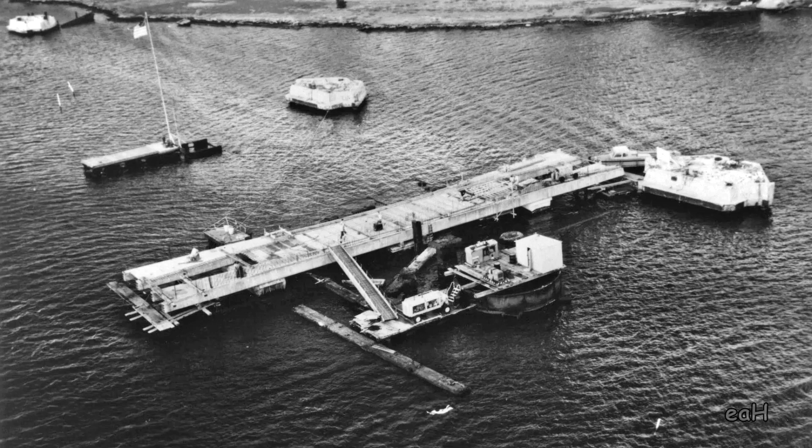Sounds good, except that this wedge is 184 feet long, and it's sitting over the memorial, the Arizona, which is shifting in the mud. Solution: stressed or reinforced concrete, very much a pioneering technology at the time, in the shape of tuning forks, separated by 111 feet, but you're on this very, very unstable ground.

What do you do? Even though the water is only 40 feet deep over the Arizona, you sink the piles down 150 feet for stability. We're talking about an engineering feat here.

Fast forward to all around the Pacific, job after job after job, patent after patent after patent regarding reinforced precast concrete. And it gives me pleasure to first bring up Mr. Hans Krock, who is working to this day with that scrawny kid terrified in Kaimuki. Mr. Hans, it doesn't look too scrawny right now.

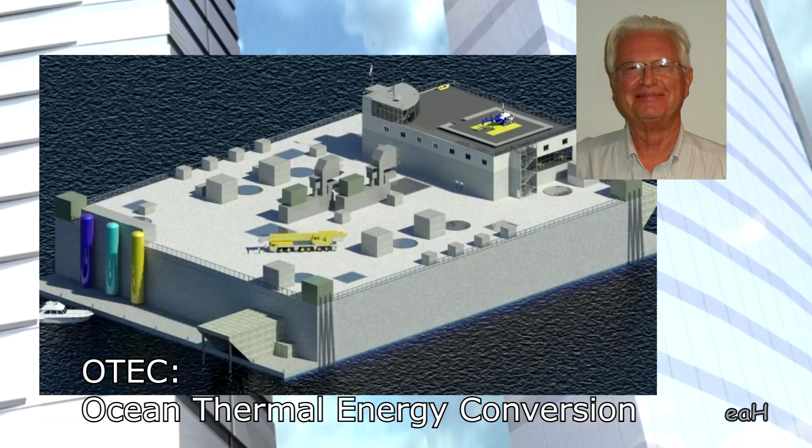Thank you. It's been a delight these several years to work with Al Yee. We're working together to develop OTEC, and the key element to making this a success is Dr. Yee's platform. We hope to be instrumental in a revolution in the Pacific about energy production, water production, and all the associated good results from the largest energy resource in the ocean. Al is a delight to work with. Every morning he comes up having invented something new overnight. It's amazing, his brain never stops.

And so I would like to introduce him to you. One of his achievements is the wing, the structure, the sail, one of the tallest, thinnest buildings ever built, actually. He successfully built that in Singapore. So let me give it back to you. Mr. Al Yee.

Thank you very much, thank you all very much. I don't know how to start with this kind of introduction, so I'll just go on to the subject matter. We practice structural engineering, and many times we are at the service of architects. The architects require certain column spacing, certain directions of beams and slabs and spans. Our job is to make it practical, make it buildable, and cost less.

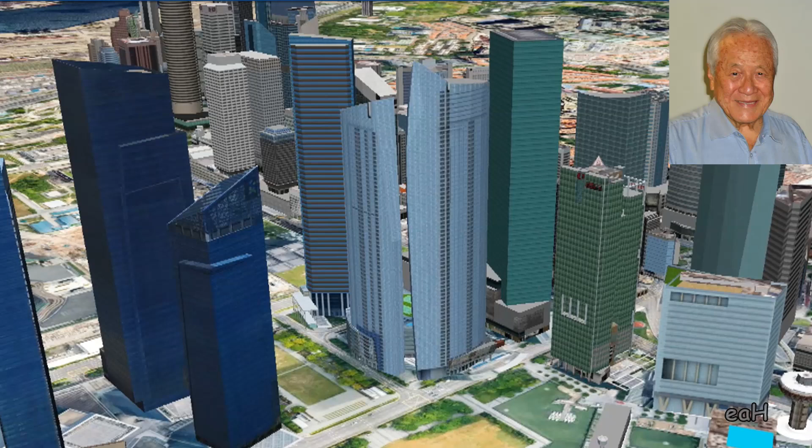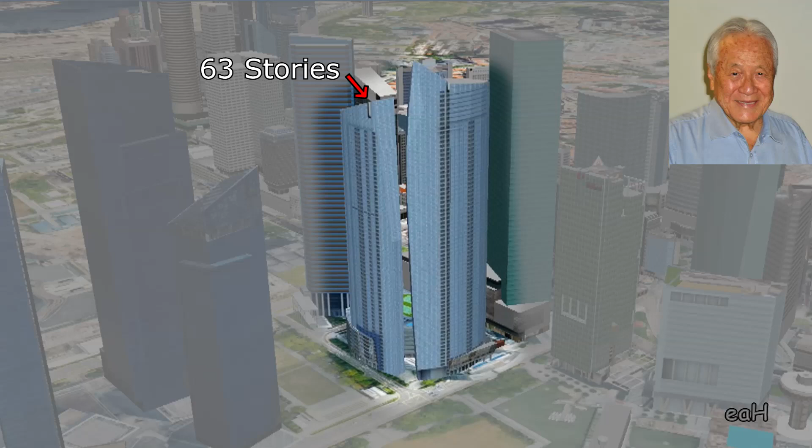So in Singapore one day, we had a commission to design two buildings. One building was 70 stories high, and the other was 63 stories high. These buildings were to house 1,111 condominium apartments. It was built right on the shores of Marina Bay, a very expensive, high-class district right near downtown Singapore.

The architects were from Seattle, NBBJ, which stands for Naramore, Bain, Brady, and Johanson. I know all the partners from the old times, and they're all retired now. I was a little kid when I started working with them, so I'm following them closely.

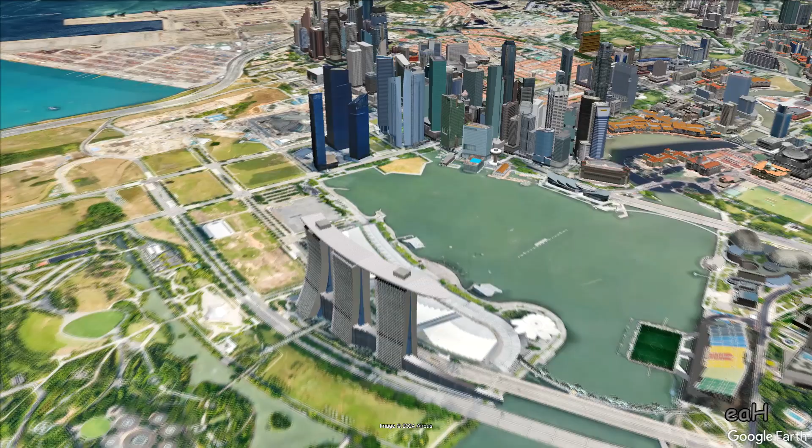Anyway, they came in and mentioned that this very thin tower, Tower 1, the tallest tower, is 245 meters high. The floor plan is like a football, so it has a wider and a narrower dimension on the plan. The widest plan portion is only 22 meters. So the aspect ratio is 245 over 22, which is over 11. Not many buildings I know of have an aspect ratio of over 11.

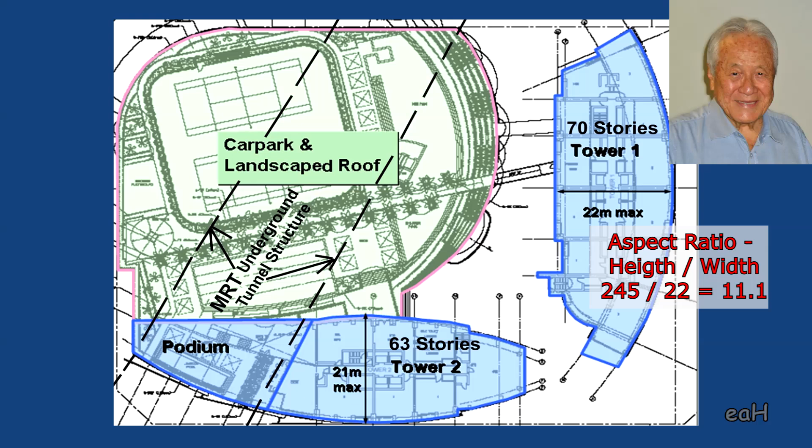If you take a 12-inch ruler, 1 inch wide, and put it on your table like that, that's an aspect ratio of 12. Ours is a little over 11, so you're talking about a very slender building. I can do the 12-inch high building, but I don't know if I can do an 804-foot high building. We warned you that we designed 5 of these projects, and none of them got built because the price was too high—they're so skinny.

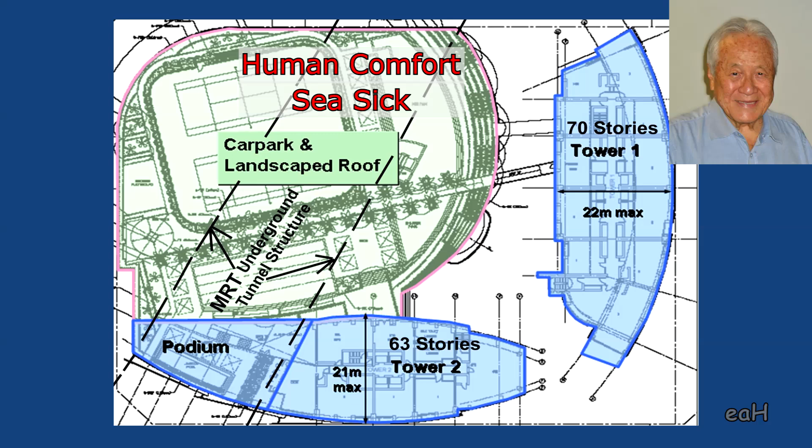Many things you worry about in high-rise buildings. Number one is human comfort—that's the term I use, because you can get seasick if the building rocks, due to the von Karman vortex. The wind doesn't have to be high, it's just a normal windy day, and you can have this vibration. So that's the biggest worry.

Of course we also worry about strength. In the year 1999, Taipei had a huge earthquake, and I went there to check some buildings for a client of mine. I saw a high-rise building lay flat on the ground, like somebody going to sleep. It's scary—you see the windows, doors, the corridors, everything. I said, wow. But anyway, I told the architects that if they pay attention to our suggestions, I think we can bring it in within the price, and get it built.

This cantilever from here to here, this bow sticks out 10 meters, about 32 feet. This guy here goes backwards. This is a 63-story building, and this is a 70-story building. It's right on the shores of a beautiful Marina Bay, where the Sands Casino is located, along with financial centers and all kinds of things.

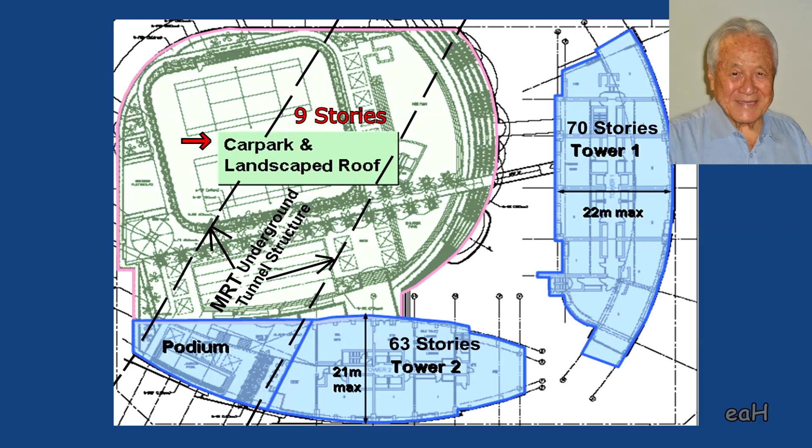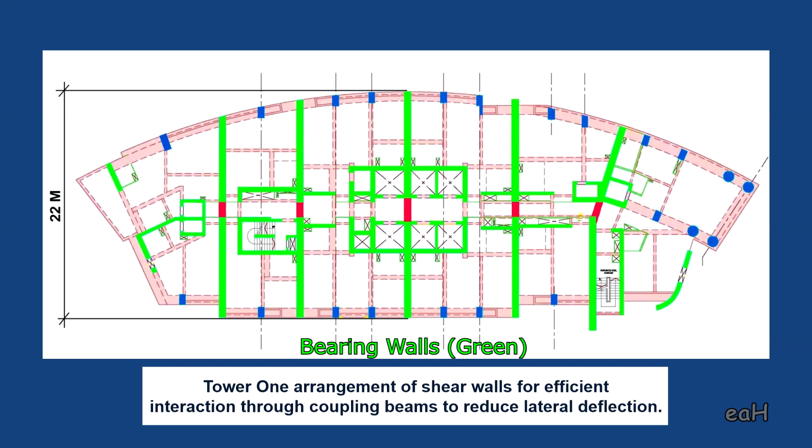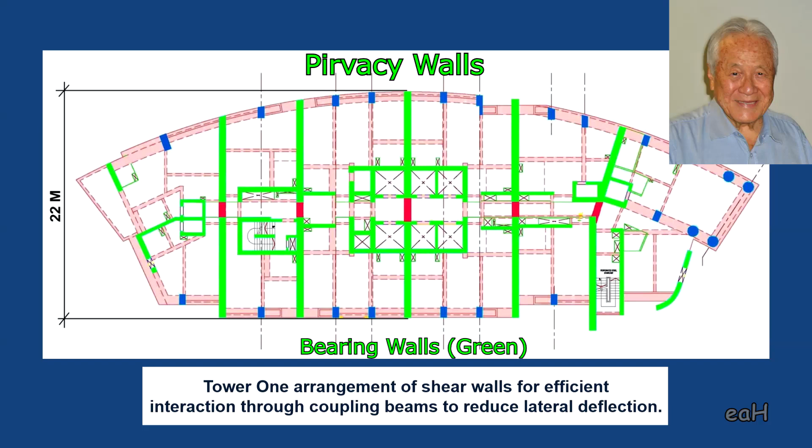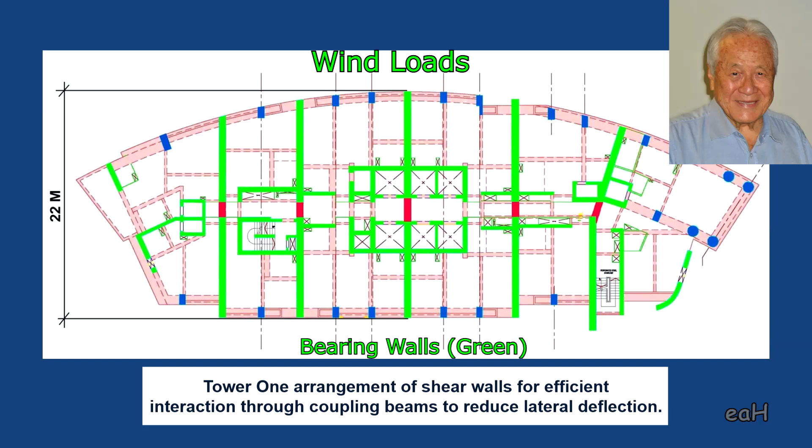Now, the structural framing - this is where things get serious. I told the architects that we have to line up these bearing walls, and these bearing walls have 3 or 4 functions. First, they're firewalls to prevent fire from spreading. They're privacy walls, so you don't hear one person living in this apartment and the other guy can hear you. They carry the vertical load of the building, like gravity loads.

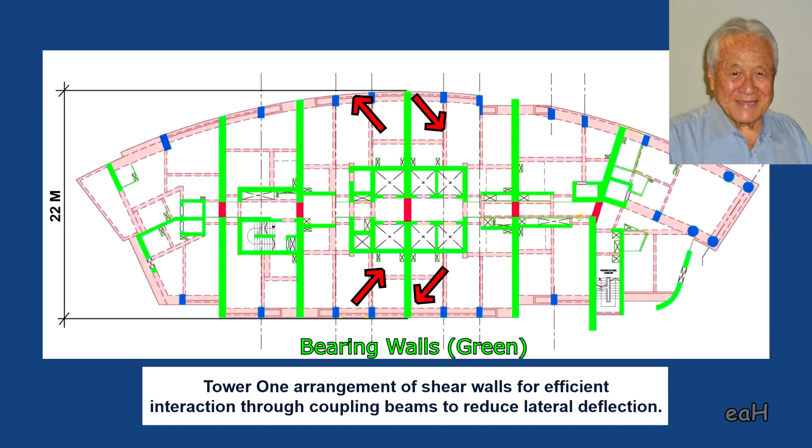It carries wind loads because you try to push it sideways with wind, or earthquake. This will act very efficiently against any forces coming from this direction, and then you have some walls in this direction which act very efficiently against that direction. But you have a whole bunch of little columns, not shown in this drawing, that are 3.5 meters on center with a combination of the spandrel beams, so you have like a network - you'll see that later in the pictures. But they help resist this direction.

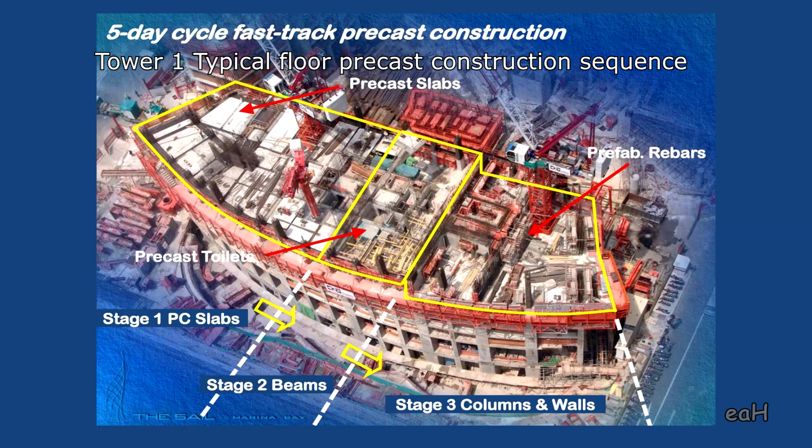That's the building going up. It's a 5-day cycle, which is pretty fast for this size building. And the precast - all the floor slabs are precast. The walls being so heavy, we couldn't precast them, because the walls are 2 feet thick on the lower floors, going all the way up to 1 foot thick at the top floors.

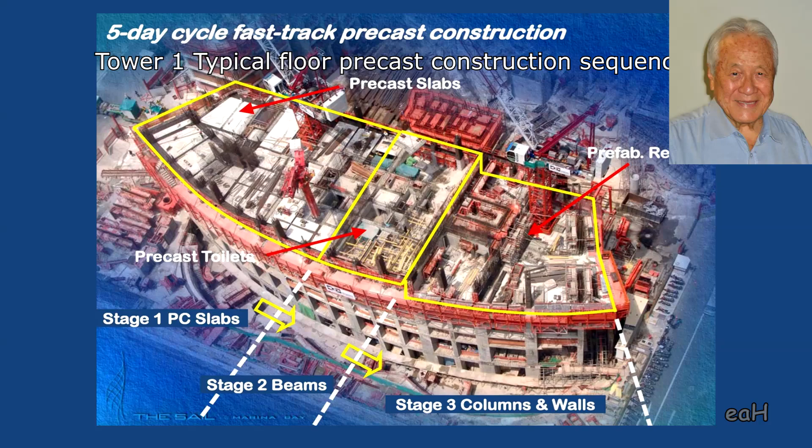Now, imagine your human body. You want to be able to resist this kind of force, and you can resist this kind of force. But you don't want to be having your body twisted, like here, before the orthogonal forces strike you, because it'll break your spine. Well, the building has the same kind of feelings, because the columns, beams, and all that behave as your spine. And so this verifies that we have a relatively safe building for earthquake.

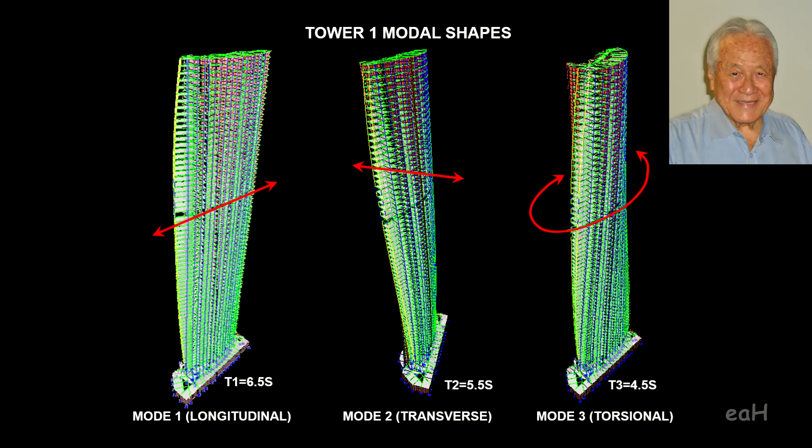The earthquake intensity we use - although Singapore earthquake is not in the code, they don't have the need for earthquake - but I injected it because with this skinny building, I just visualize those 1,100 occupants. They're going to call me in the middle of the night: Mr. Yee, is my building safe? The coffee cup is shaking and spilling on the table. I want to sleep good, so I told the client I'm going to have to design for earthquake. But if I told him about designing for human comfort, how does that happen? How do you do that? All I know is that I took an earthquake, and then I checked the lateral translations and felt that it was safe enough for comfort of living.

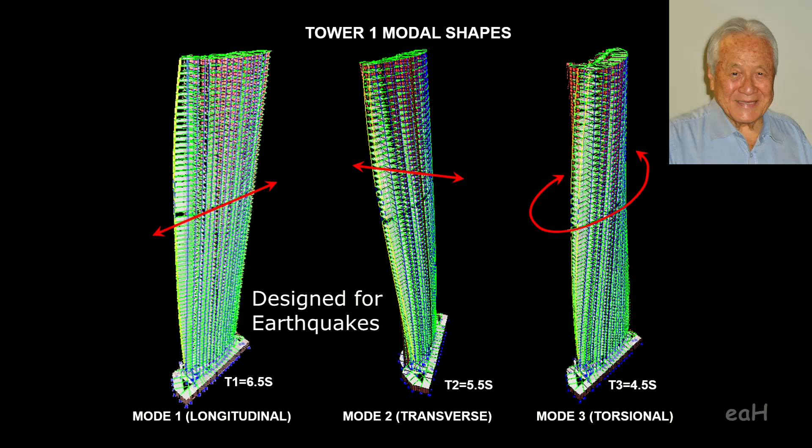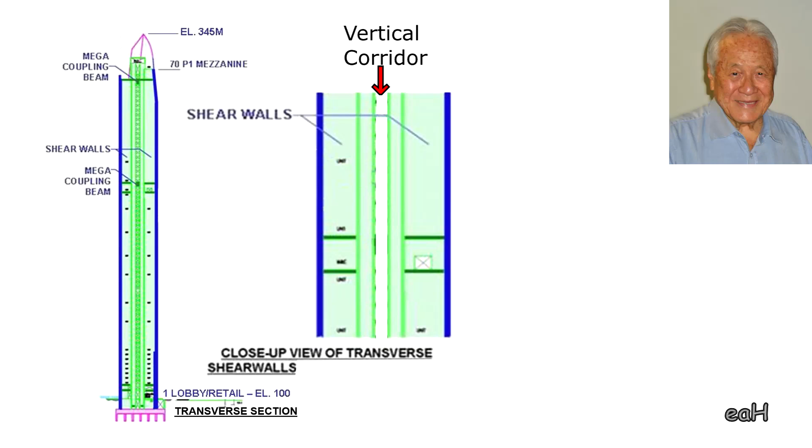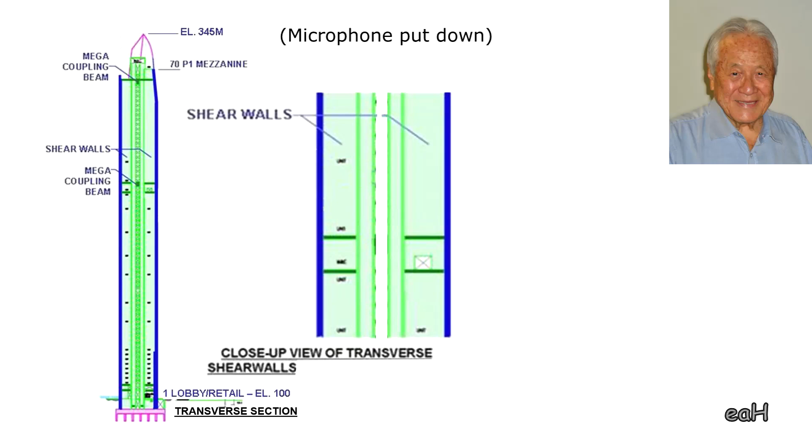Now, here is the key, one of the greatest keys. This is a shear wall you saw, on one side of the corridor, and a shear wall on the other side of the corridor - this is the corridor here. And wherever you have the corridors and the floor slabs on each side of the corridor, I join these slabs together with what we call a coupling beam. In other words, if you had two independent shear walls, they would rock independently.

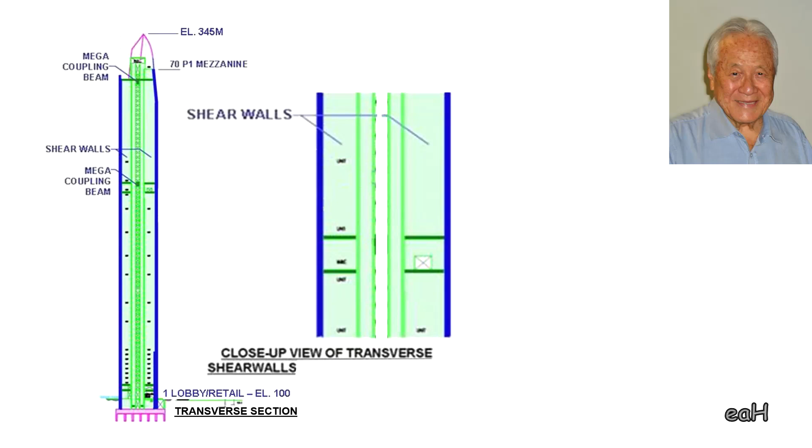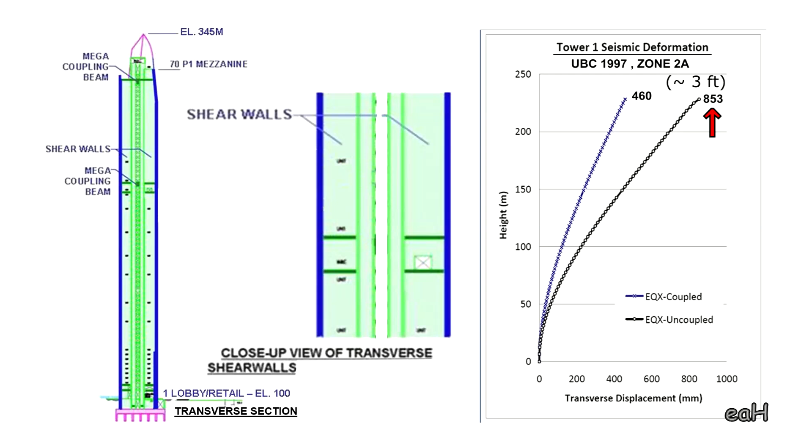If I don't couple the shear walls for this earthquake, the lateral deflection on the top will be 853 millimeters - just about 3 feet. But if I couple it, it goes down to 460, which is about half. And for wind, the maximum wind, if I don't couple it, the deflection will be 402.

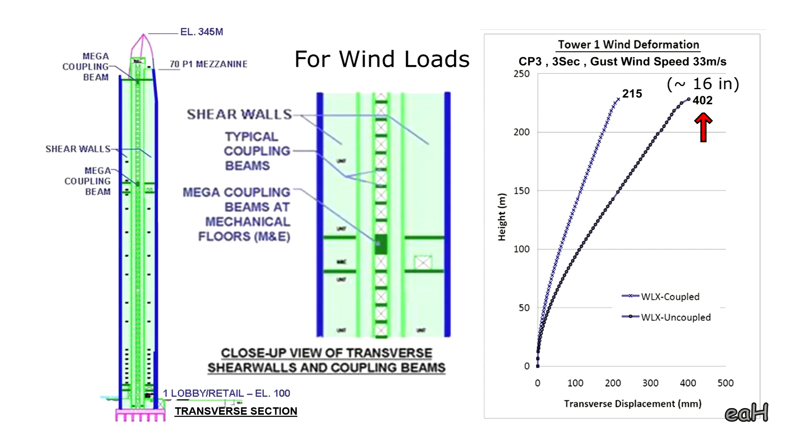We can't place the beam, but in the beam we put special reinforcing steel with links and all that, so you can take bending moment both ways, reversal and all that. But in our computer output, some of the coupling beams were so high you cannot get enough reinforcing steel in there. So I put a huge I-beam, thick flanges, thick webs, which is much stiffer, heavier, stronger, and put that in along with some reinforcing steel and closed ties. There were about 14 different locations we had to do that because of overstress in those areas. But without modern digital computers, you can't do this.

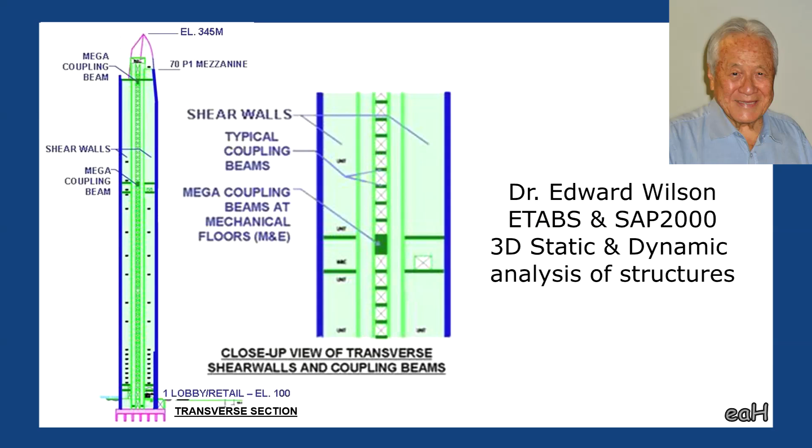Fortunately, we have close connections with Dr. Wilson in University of California. He's the author of ETABS and SAP 2000, and most engineers in the world use those programs. But we still got to go to him for that advice.

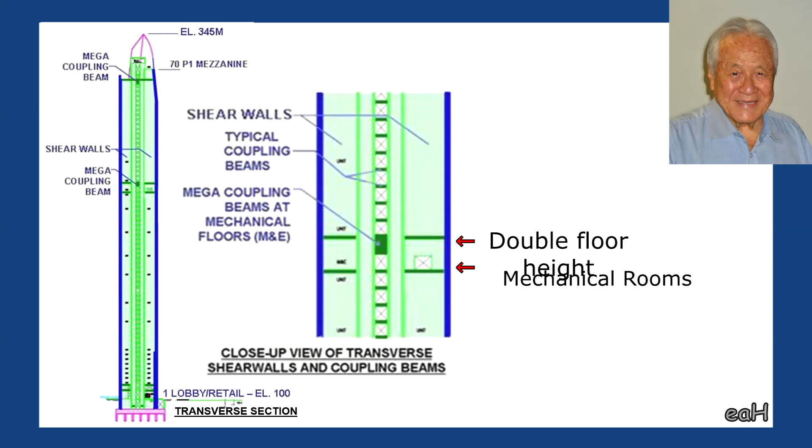Another feature is there are certain floors where we have double floor height. The floor-to-floor height, the typical, is 3.2 meters. But we have some that are 6.4 meters, that's over 20 feet high. Those floors are for mechanical equipment, huge air conditioning ducts, air handling units - you gotta have high ceilings. But the people, the headroom doesn't have to be higher than about 6.5 feet.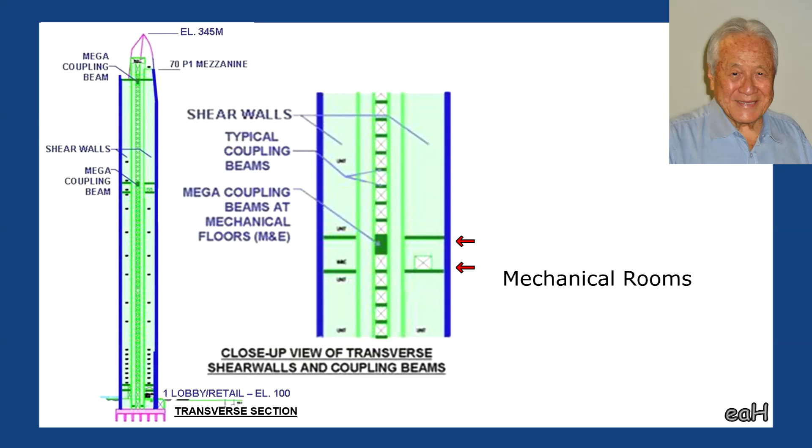So what we do is maximize the depth of the beam there. We call it a mega coupling beam. And we can maximize wherever you can - you can do it here, here, and up there. Wherever you can do it, put it in, and crank it into calculations, and you'll see that you have a lot of benefit from it.

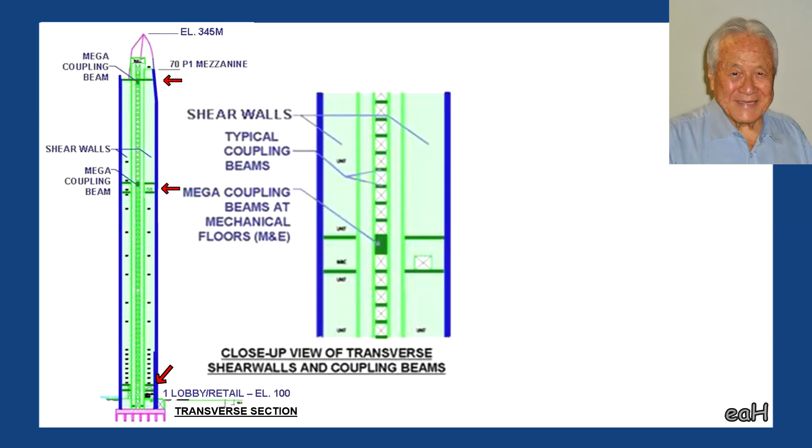Now down on the ground floor, the lower floor, you have certain restrictions. We have to build this passageway for the public because there's a park here, and the public can walk through the building to access the park. This is 14 meters wide or something like that - it's very, very wide.

And with other entrances and all that, we have what we call a soft floor. If the walls went straight to the ground, like most typical walls, fine. But some of them get interrupted before they hit the ground, then you got some huge stresses - in other words, amplification of stresses. Imagine this thing is 840 feet high, and if you grab the top of it with the earthquake or the wind, you're going to magnify the stresses here, huge one, big time.

So instead of making this out of 6,000 pound concrete like we do here, we use 12,000 psi concrete - we call it grade 80. And these are some of the analyses that led us to realize no matter how much steel you put in, you got to increase the concrete strength, and you got to put a lot more steel.

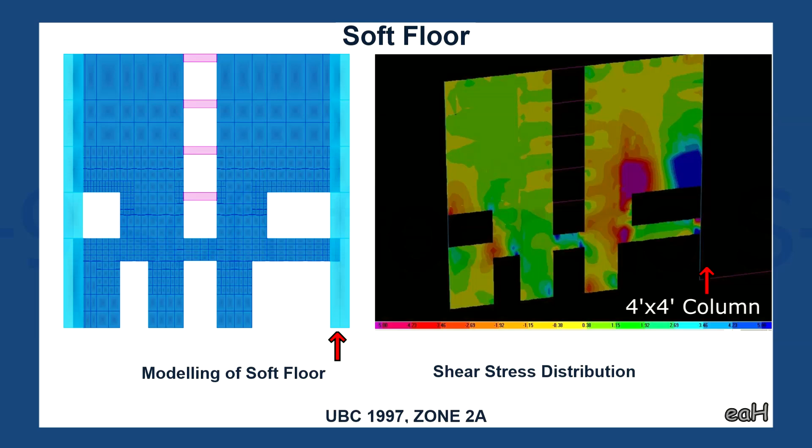But you got to have that because when you run through the formulas, we run across an item called the omega factor, the omega sign. And in this case, it's 2.3 - in other words, whatever you calculate for the load, multiply by 2.3 times. That's based on mathematical research. So these factors are not well known to most engineers because they take into consideration the amplification, the rhythmic, the pounding forces and all that.

And so you automatically have to do some provision for highly increased stresses.

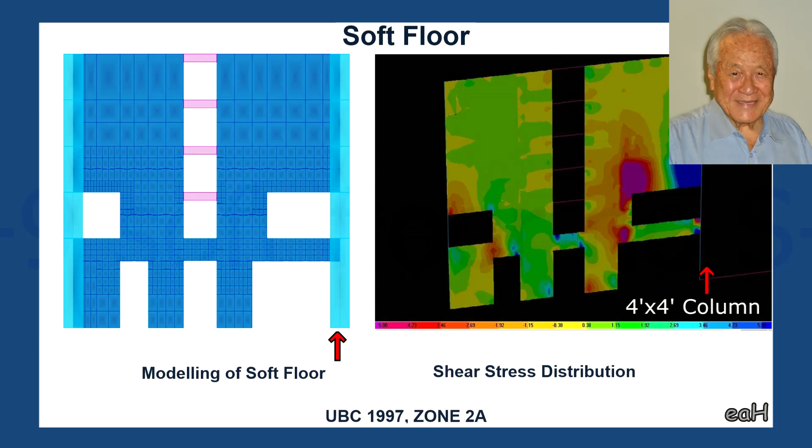Then wind tunnel testing. This is wind tunnel testing with the existing buildings in the area, and wind tunnel testing for future buildings around there.

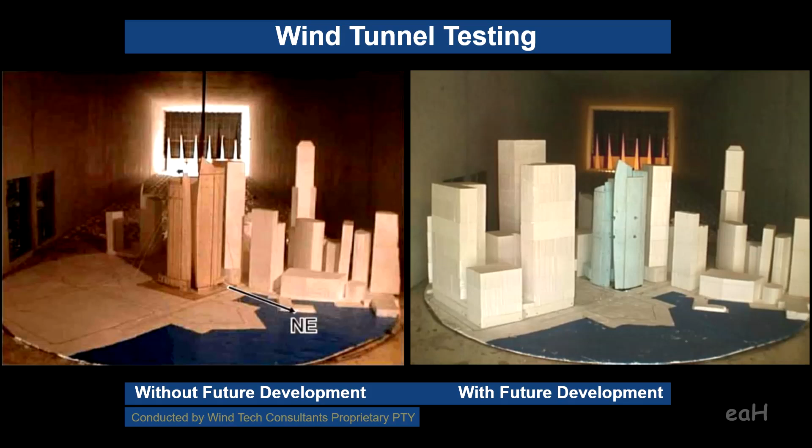We don't know when the future is coming in. It might be like this for 10 years, or it might be like this for 10 weeks, and then they start building. So you got to provide strength for both situations. And the results...

This is the tall tower, the one that's 70 stories high. The wind results, what we call the milli-Gs, is what we measure accelerations. As you blow the wind at different angles, this is the way the accelerations are. The magnitude of the accelerations, like the outer circle represents 16 milli-Gs, that's like 0.016 gravity force.

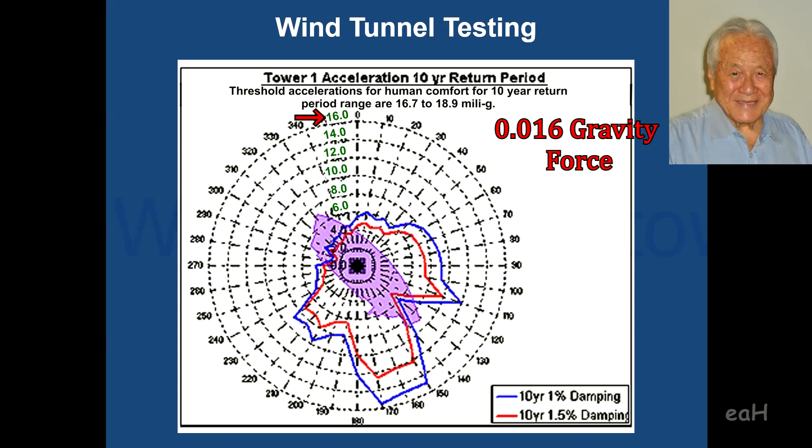Or 1.5%, 1.6% gravity. So if it's a 10-year, 1% damping, you get less restraint, so the accelerations are bigger. If it's a 10-year, 1.5% damping, that means you have more restraint. So the red line would be the acceleration curve.

We know from the studies that somewhere between 16.7 and 18.9 milli-Gs you have the threshold of human awareness. That's when you start feeling it, people start complaining, you call the building manager, call the engineer. But notice we don't have anything going up to 16 — we kind of saved it, right up to about 15 and a half, for the 10-year event. Of course, that doesn't say you may have a 20-year recurrence which is bigger. Hopefully you get a call once in 20 years, not so bad as once every 10 years.

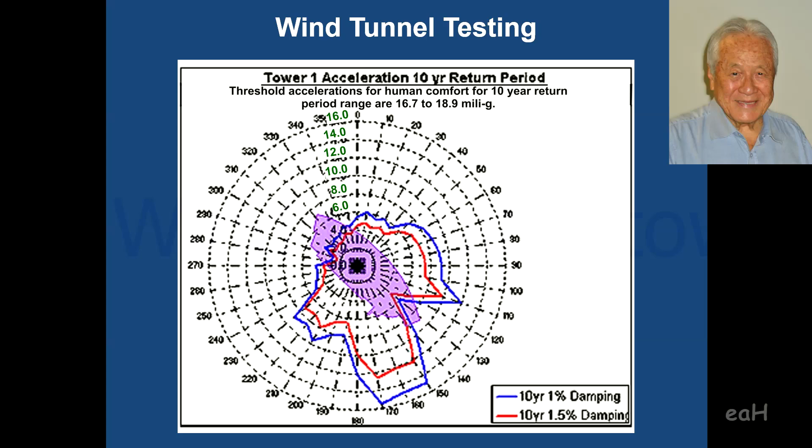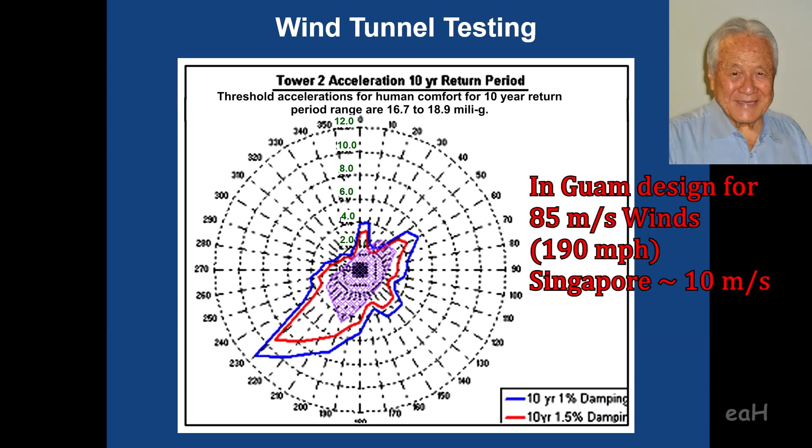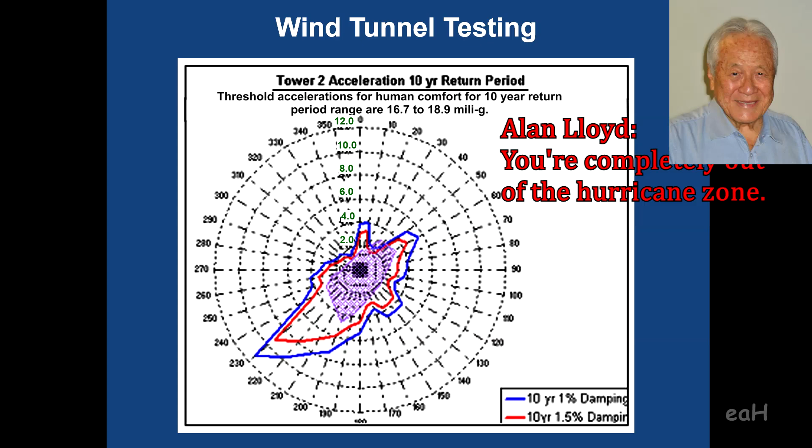In Guam we designed for wind forces like 85 meters per second. Over here it's like 10 meters or something like that. But you're completely out of the hurricane zone there, aren't you? Yeah, because you're near the equator. Once can tell you that along the equator there's no hurricane, but that's where they're born.

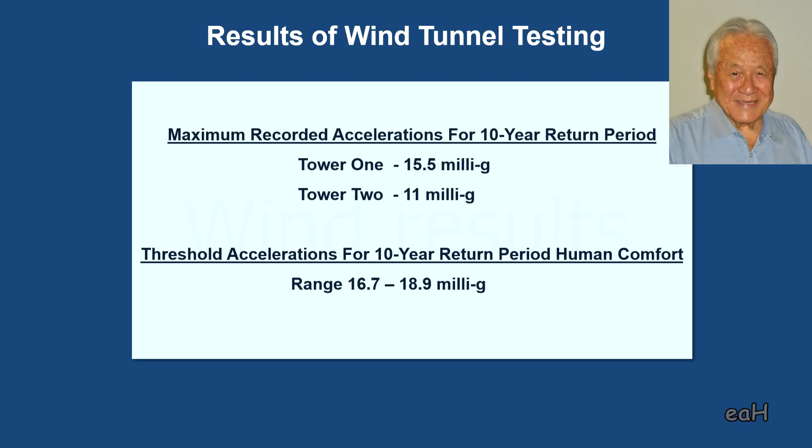So this is a summary of the response to wind tunnel testing, accelerations — that's a human comfort thing. The real effect in wind tunnel testing is what we always find out: we walk in the open air lobby and all that, and wow, the wind is rushing all over, women's skirts blow up, that kind of thing. But no buildings fall down.

We talk about architects doing iconic buildings and making us miserable engineers work harder for our fees and all that. But for the first time in my life I realized there's a benefit to it. When they finished, the project manager's representative said, 'Hey Al, I'll do unit 01 for you because you worked on the building.' And I said, well, us engineers, we know how to build them, we know how to design them, but we don't have enough money to buy them.

They were selling for $1,000 a square foot. And us poor engineers — a 1,000 square foot apartment is $1 million, and that could be any floor, and that's the minimum. They ran from about $900 to $1,100 a square foot. I turned it down. To this day my wife would never forgive me for that stupidity, not for anything else I did.

But then they said, wow, the thing sold out in one week, 600 units. They must have underpriced it, so they waited three months and raised the price to $1,800 to $2,000 a square foot, and it sold out in one day. Now who's wrong, the first guy or the second guy? But the biggest mistake is guys like me — I stayed away from all that crazy stuff.